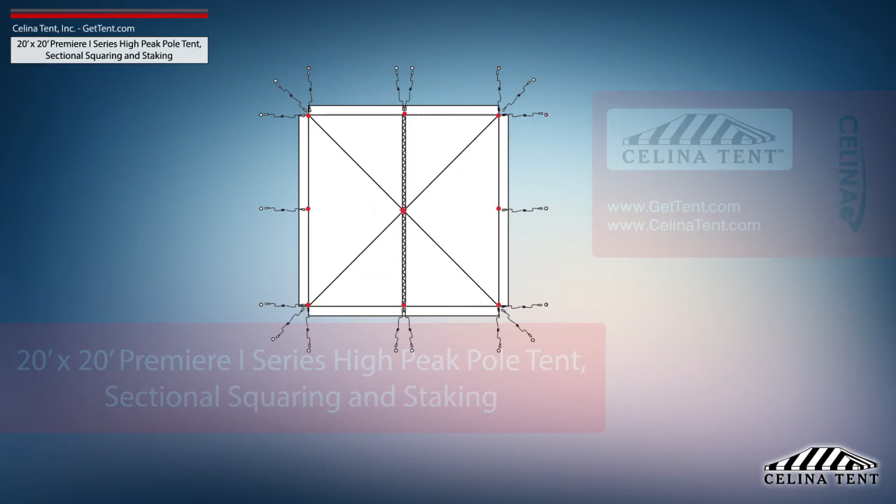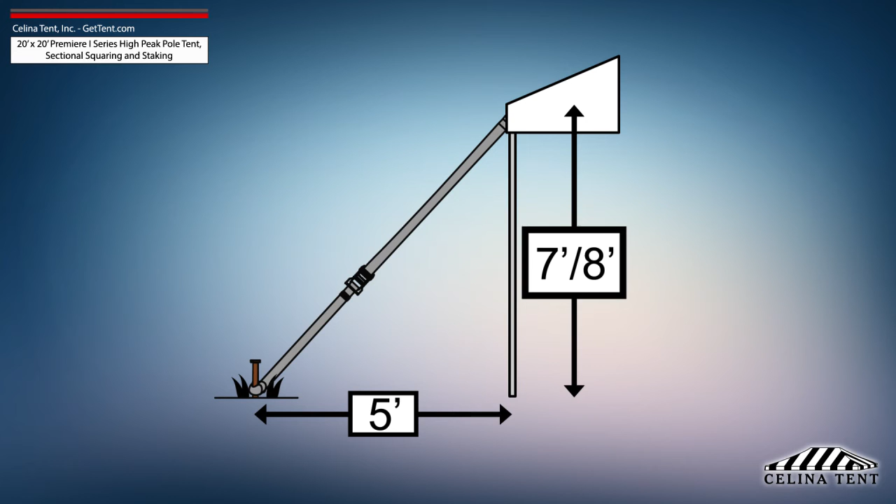This video covers squaring and 5-foot staking applicable to a sectional 20-foot by 20-foot Premiere I Series high-peak pole tent from Celina Tent. 5-foot staking is standard for tents with an eave height of 7 or 8 feet, and would need to be adjusted for eave heights other than this standard.

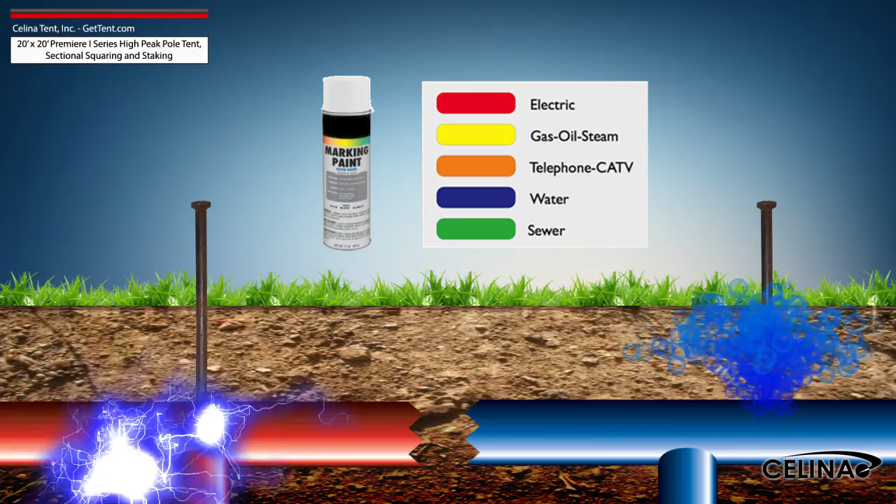Tent squaring allows the installer to accurately place all tent hardware and install tent stakes prior to beginning setup, and helps them avoid any marked underground utilities. Utilities must be marked by your state's local utility services prior to any tent installation.

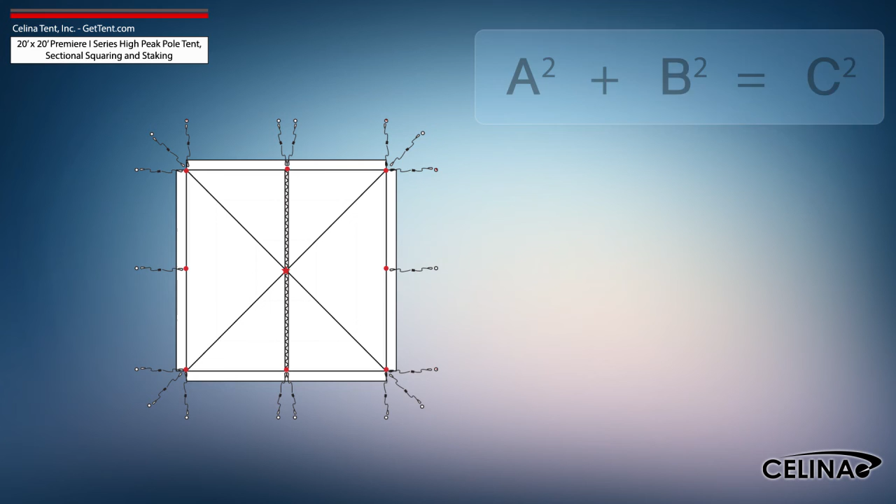Using the Pythagorean theorem and adjusting out for 5-foot staking, the entire tent footprint will be 30 foot by 30 foot with a 42-foot 5-inch diagonal length.

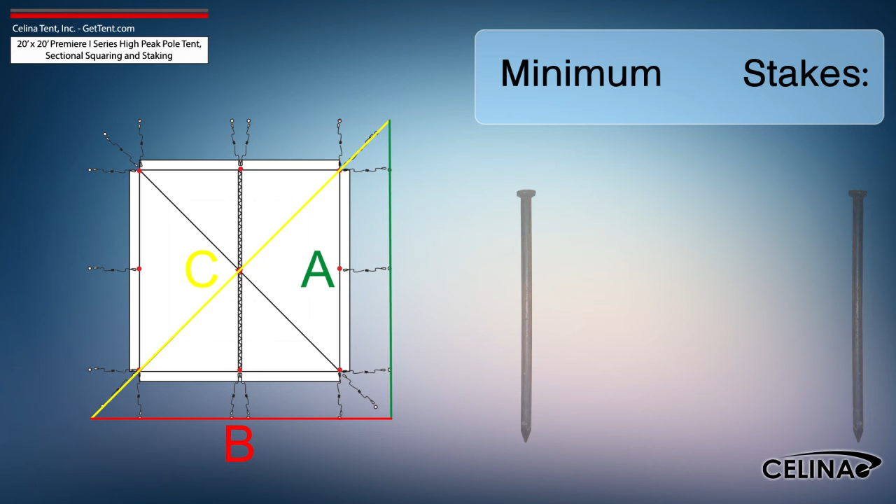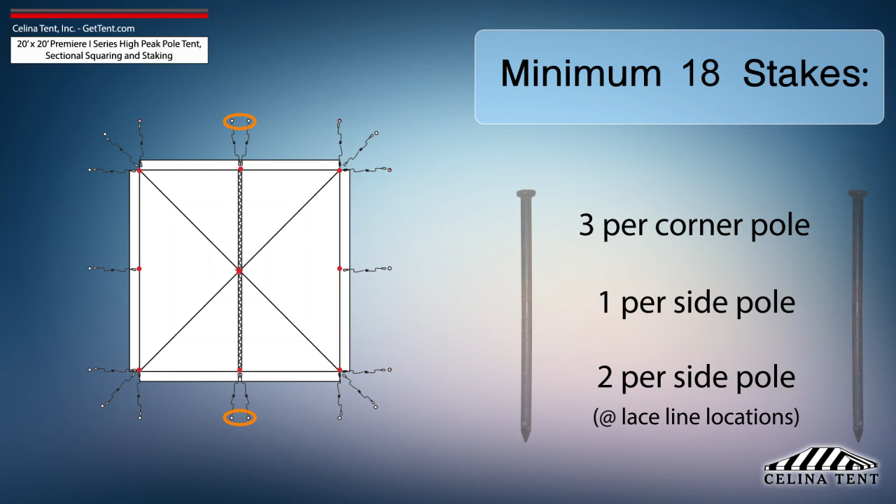Celina recommends that a 20-foot by 20-foot Premiere I Series high-peak pole tent receives a minimum of 18 stakes: 3 stakes for each corner pole, 1 stake for each side pole, and 2 stakes for each side pole at laceline locations. This amount of stakes provides the minimum amount of security for a pole tent of this size. Additional staking is required for any site that doesn't meet optimal soil conditions.

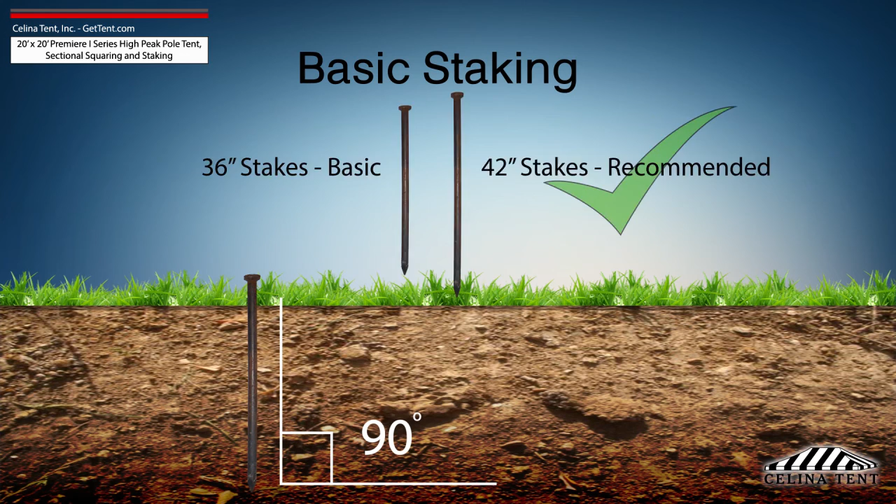Tent staking is the most important safety procedure during tent installation. Tent stakes should be driven vertically so that the stake is as close to the ground as possible with space to tie on a strap. Any length of stake protruding from the ground that is more than 6 inches will have detrimental effects on the holding power of the stake. Attach the ratchet strap or rope as close to the ground as possible to reduce strain on the stake.

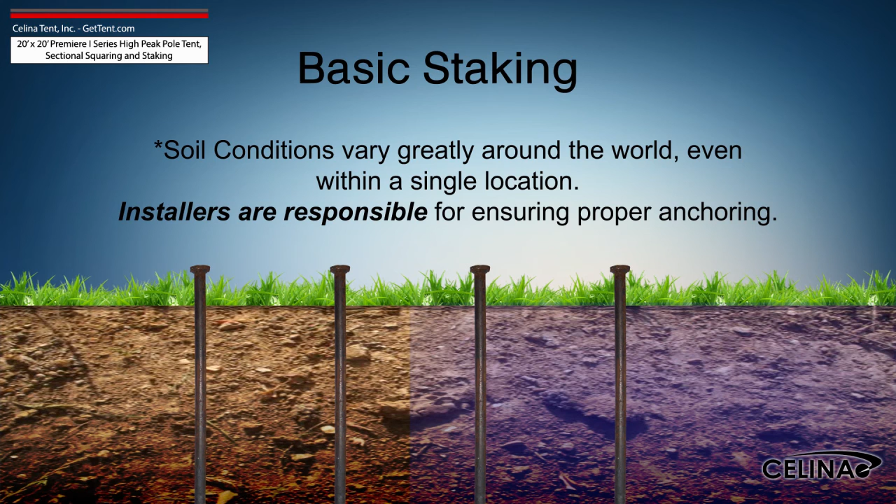It is the installer's duty to inspect the soil conditions and possible weather effects for the duration of the tent installation. For water-saturated or loose soil, more tent stakes are required to achieve adequate anchoring. Staking may be increased using dual stakes and a staking plate, or gang staking utilizing 2 staking plates and 3 stakes.